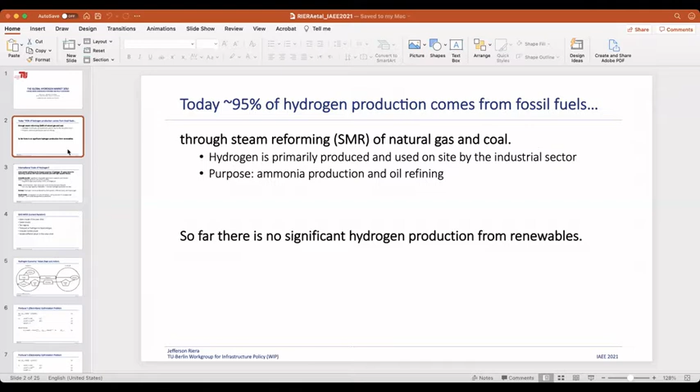However, one thing to consider is that hydrogen is incredibly versatile. We can utilize it for fuel for transportation, for heating, to produce e-fuels, and for energy storage. So as a result of this, the global demand for hydrogen is expected to increase, and renewables can potentially facilitate that production worldwide. So with different countries trying to produce hydrogen, there's a significant potential for trade.

So in terms of international trade, the Asian market will likely be the largest consumer of hydrogen, and that can potentially open doors for exporting countries with low-cost electricity and high capacity factors. Specifically, countries like Australia, at least the south of Australia, has significant renewable generation capacity and limited interconnection with the rest of the country. So it's a prime area to produce hydrogen, and as a result, Australia has made plans to export to Japan, South Korea, China, and Singapore once its facilities are up and running.

The other part of the world, you have Chile, which leverages one of the best solar resources in the world. It has low cost and high capacity renewables potential in the Atacama Desert, and that can translate to low cost hydrogen production for Asia. In Europe, you have Norway, which has the potential to produce hydrogen from hydropower, offshore wind, but also from natural gas through methane steam reformation. And also Norway has the idea of trading this hydrogen with the Asian market itself.

And then lastly, countries such as Saudi Arabia, you have complementary wind and solar resources to generate hydrogen in different parts of the country, and it's potentially to be transported as ammonia. Now, one fun fact is that Saudi Arabia exported the first shipment ever of carbon neutral ammonia to Japan, and this is a very important realization for the hydrogen economy for both countries.

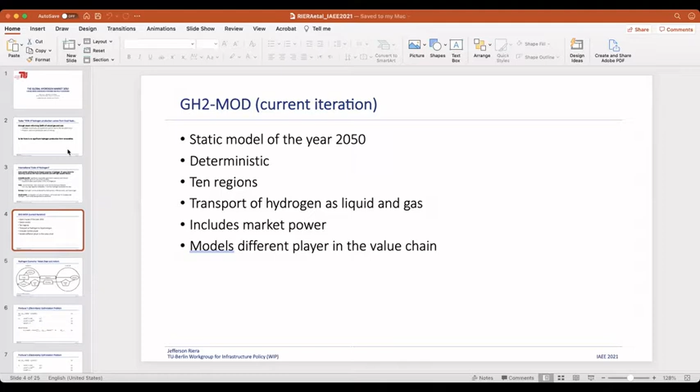So what we did was we developed the first iteration of the GH2 model, so our version of the global hydrogen model. And it's a static model of the year 2050. It's deterministic, so it assumes perfect information, and it aggregates the world into 10 regions. And it allows for the transportation of hydrogen as liquid and gas. It includes market power, and it models different players along the hydrogen value chain. Specifically, those players are

So each of these players essentially is modeled as a profit maximizing problem. And here we have the problem for the producer, in this case, electrolysis. Essentially, the producer is trying to maximize the difference between its revenue and its production costs, and it's subject to a capacity constraint, which dictates the upper bound on the amount of hydrogen that can be produced in that given year. We can also have constraints that restrict total production due to governmental limits, so that's equation 3, and this is production ceiling essentially. And then we also have the non-negativity constraints of the sales.

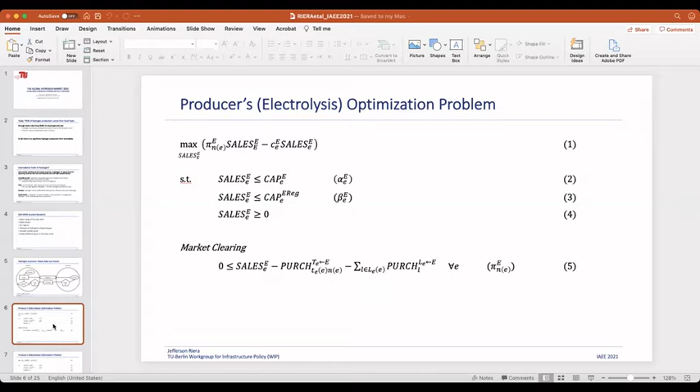We would want them to be positive. And then we also have the market clearing condition, which states that the producer sales must be greater than or equal to the purchases made from its trader and the sum purchases of its liquefiers. And it's this market clearing condition that establishes the market clearing price that the liquefiers and the traders pay to the producer. So we have the same optimization problem under constraints and market clearing conditions for all other players, and we also have them for the player that is the producer, but it's producing via SMR.

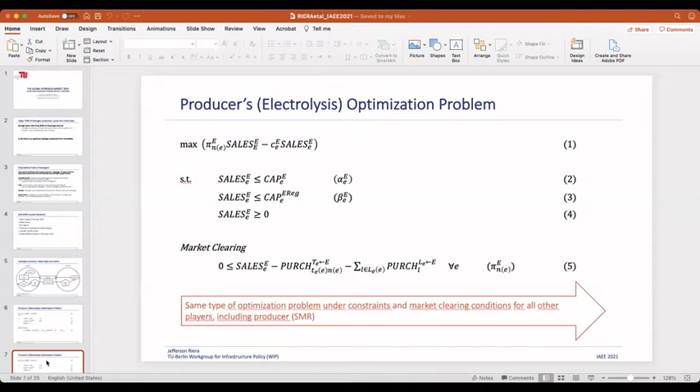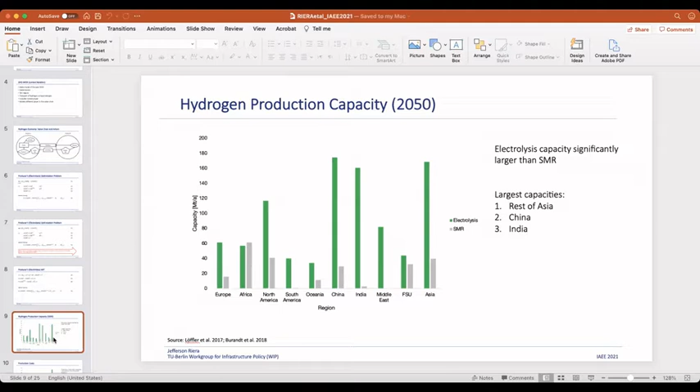So for each player, we collected extensive data on technologies, the cost, the demand, the infrastructure for our specific target year 2050. So here for the producer, we have hydrogen producing capacities, and these were obtained from model outputs of GENeSYS-MOD, which is a global energy systems model developed by colleagues at TU Berlin. So what we see here is that for 2050, we have SMR and electrolysis capacities for each region, and we see that electrolysis capacity is significantly larger than SMR. The largest electrolysis and total producing regions are the rest of Asia, China, and India.

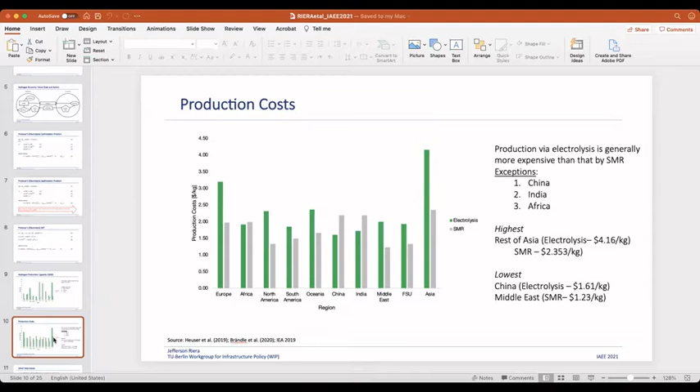And in terms of production costs, we derived estimates using IEA and equations found in Heuser et al. and Brändle et al. And production via electrolysis is generally more expensive than that by SMR. That's the case for all regions except for China, India, and Africa. And what we have is that the highest cost for both electrolysis and SMR is found in rest of Asia, and the lowest costs are China for electrolysis and, not surprisingly, the Middle East for SMR. So other model inputs are liquefaction and regasification capacities and costs, total transportation costs, including the shipping vessels and the pipelines. And we also take into account loss rates along the value chain.

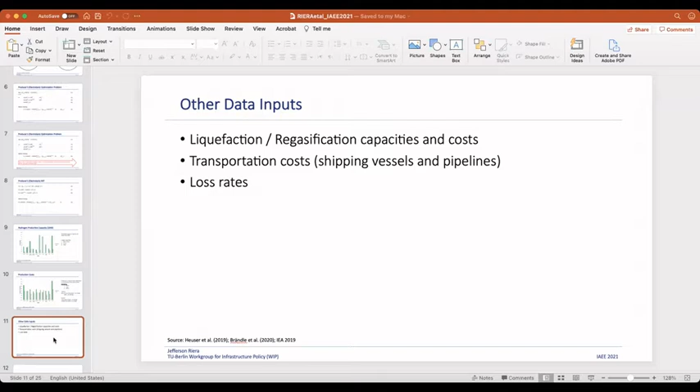So we ran the model considering perfect competition and market power, and these are the results that I'm going to present now. So for perfect competition, we have a global hydrogen demand of 634 million tons for the year of 2050. And in most regions, what we see is that they're meeting their demand with local production. The rest of Asia, however, relies heavily on Chinese hydrogen imports. And you can see that here. And nearly half of its demand is met with imports from China.

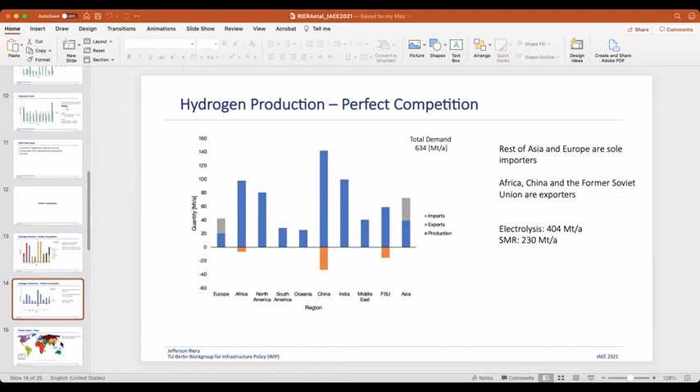And then on the other hand, you have Europe, where it's relying on the former Soviet Union and Africa to meet its hydrogen demand. And again, it's also the case that half of its demand is met with imports from these two countries. So on the production side of things, what we're seeing is that the rest of Asia and Europe are the sole importers, and Africa, China, and former Soviet Union are the exporters. And nearly 2/3 of hydrogen production comes from electrolysis, with the remaining coming from SMR. So here we have the network, essentially with our regions. And again, each region, well, at least most of the regions, are meeting their own hydrogen demand. So we have isolated systems: North America, South America, the Middle East, India, and Oceania.

So the results for market power are a little bit more interesting. What we see for market power is that we have a global hydrogen demand of 520 million tons for 2050, of which China, Africa, and the rest of Asia account for 50% of the global demand. And if we look at how the demand is met, what we're seeing is that there's significantly more trading happening with market power than there is with perfect competition.

What initially happens is that the global demand is reduced by 20%, and India's demand is cut in half. In the perfect competition case, what we were seeing was that the demand for India was close to China's. So here's India in perfect competition, and then in market power. What we're also seeing is that Africa's hydrogen is penetrating different markets.

So in the perfect competition case, you have it selling primarily to Europe, or only to Europe, but now it's also selling to the Middle East and to the former Soviet Union. One thing that we're noticing is that other regions are also starting to sell to other markets as well. However, North America, South America, India, and Oceania still remain isolated.

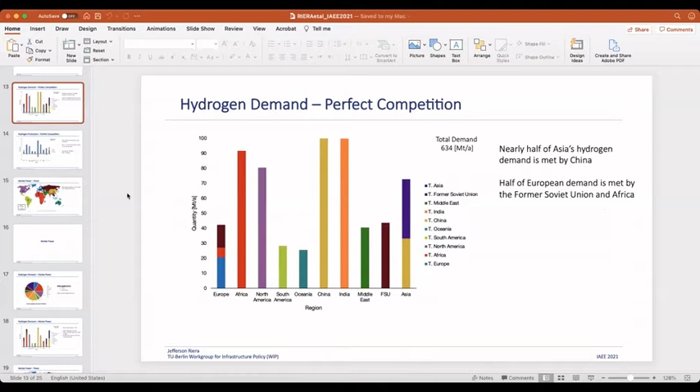Another difference between market power and perfect competition is that with market power, Europe is relying significantly more on imports to meet the hydrogen demand, and specifically imports from Africa. So in the perfect competition case, Europe with its own production met at least half of its demand, but now it's only meeting a very small percentage.

So this is now the network that we developed under market power. And essentially what we're seeing here is that, again, there's significantly more trading between the countries. However, specifically, we're seeing two big trading factions occurring here. So we have the flow from Africa into the Middle East, Europe, and former Soviet Union, and you have this faction here in Asia between China and the rest of Asia.

What we're also noticing, however, is that despite there being more trade between the different regions, there isn't any trade in liquid hydrogen. And this is attributed to the high cost of liquefaction, the high cost of regasification, but also the high cost of shipping.

On the production side, what we're seeing is that right off the bat, China's production accounts for nearly a fourth of the global hydrogen production. And what we're also seeing is that countries are taking advantage of external hydrogen prices so that they are strategically importing and exporting hydrogen from the same regions. So essentially the desire to trade depends primarily on the regional prices and also the production capacities available within the country itself.

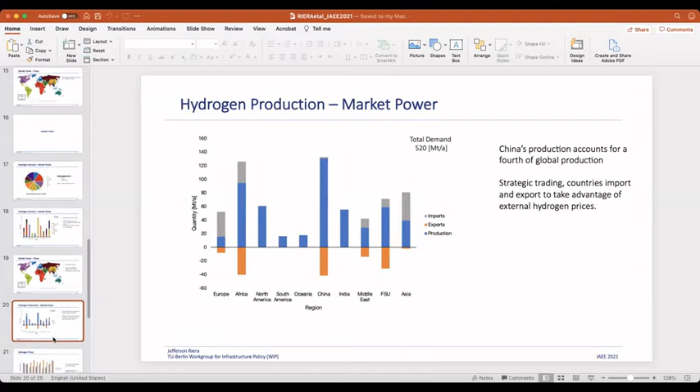And then in terms of prices, comparing the perfect competition case with the market power case, one thing we're seeing, which is not surprising, is that under market power, you generally have higher prices. All regions except for Europe and Asia have a much higher market power price than the perfect competition price. And when you take the weighted average of the global price of hydrogen, for market power it's $3.36 per kilogram, compared to the perfect competition case, which is $2.72 per kilogram. So essentially, there's a 25% markup when you have market power compared to perfect competition.

So essentially, these are our preliminary results for our model. But what we are trying to do now is expand the model to have a multi-period framework. Specifically, we want to incorporate more years starting from 2020, and we also want to include seasonality throughout the year. And then a big topic of discussion currently is the storage of hydrogen and also the transportation of hydrogen. So what we want to include is also storage operators. We also want to include the transportation of hydrogen as ammonia.

So ammonia transportation is very important given the fact that it's potentially much cheaper than shipping liquid hydrogen because of the added energy density that ammonia has compared to liquid hydrogen. So by modeling the transportation of ammonia, we also have to add two additional players: a hydrogenator, which converts the hydrogen into ammonia, and a dehydrogenator, which converts the ammonia back into hydrogen.

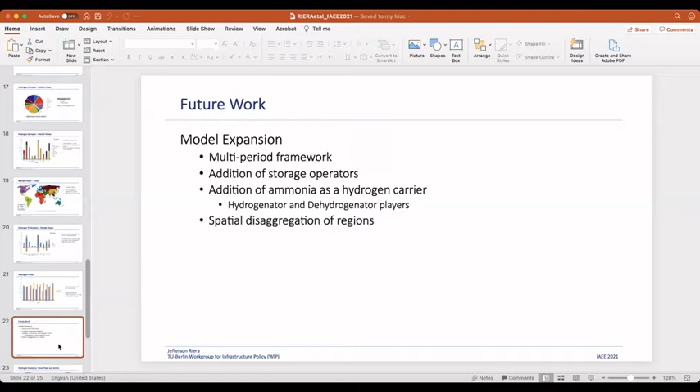So once we do that, our hydrogen economy would look pretty much like this. Now you not only have the traders and the producers and the liquefiers, you have the hydrogenators as well. The producer would also sell to the hydrogenator. The hydrogenator sells it to a dehydrogenator in another country, and it ships it via shipping vessels. But you also have the trader selling to the storage operator, and then the storage operator can strategically sell it to the market at a different time period.

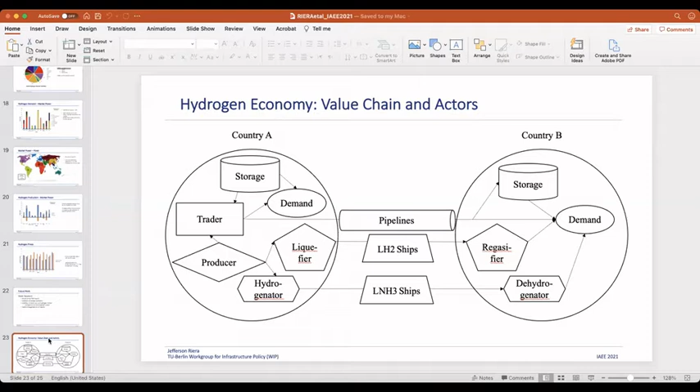So this is essentially where we want to go moving forward with our model, and essentially that's everything I have to present for you guys. If you guys have any questions. Excellent, perfectly on time.

Are there any questions? In the meantime, I'm going to start. I was curious about the question of market power. Why did you think that is an issue, one of the first issues that you wanted to explore? Which is the basically the idea that you have behind, or the driver that you're going to point out in terms of who and why there is this vulnerability to market power?

So currently, there isn't that much hydrogen production in the world, so the market isn't really developed. So what we want to make sure is to include different cases. I just realized that my camera wasn't on. Apologies. So we want to include different cases because we don't know exactly how the market is going to develop. That being said, with market power, at least what we're seeing in different markets, for example, the natural gas market, we see that you potentially have price differentials that occur, or price increases as a result of market power. So some big producing countries are able to strategically manipulate or alter the prices, and that's important in terms of hydrogen, given the fact that hydrogen is already very expensive. It's going to be a potentially expensive energy source. So we want to also capture that as well.

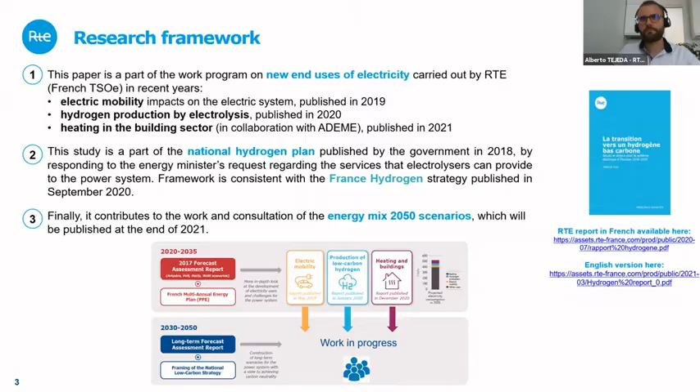I will continue with the state of the art on some perspectives of this study. First, let me give a glimpse of how hydrogen is consumed today, because nowadays we talk a lot of hydrogen. We think of hydrogen for fuel cells in mobility or for storage, but let's see how hydrogen is consumed today. In France, at least, 60% is consumed for oil refining, for petrol and diesel. 25% is used for ammonia and fertilizers, 10% for chemicals, 1% for metallurgy, and the rest is used for other things.

Now that we know how hydrogen consumption is done, let's see how it's produced. Most of it, 95% of hydrogen, is produced from fossil fuels, most of it from steam reforming, which is high carbon intensity. So it produces a lot of CO2 when we produce hydrogen from steam reforming. So what we look at nowadays in order to reduce emissions is how we can substitute this production with low carbon hydrogen. I have to say that in France, hydrogen production results in total emissions close to 10 million tons a year, which represents 2 to 3% of the country's total emissions. So the first challenge of hydrogen is to reduce these carbon emissions for these industrial applications.

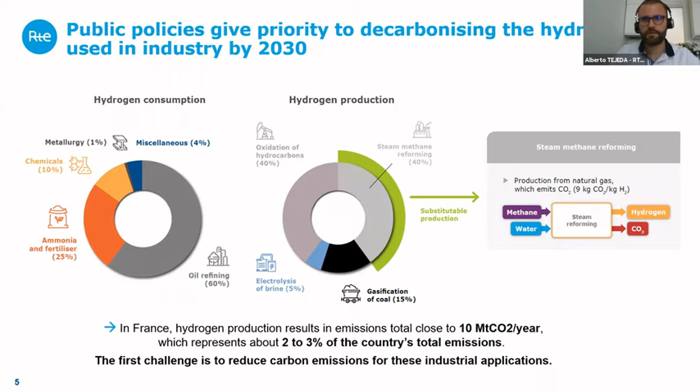There is another use of hydrogen, as I said before. We think of it as a storage for the electric system. It's the concept of power to gas to power. We can imagine that we use electricity to produce hydrogen thanks to electrolysis, and then with this hydrogen we can do two things for producing electricity back. Either we use it in fuel cells, which are going to produce electricity, and we inject it back to the system. Or we use the hydrogen in the gas sector: we can put hydrogen directly in the pipes with some limits, or we can convert hydrogen to methane and use it as synthetic methane. And this gas can be used by power plants and combined cycle gas turbines, for instance, to produce electricity back to the system.

From a technical point of view, the power to gas to power electricity storage solution is penalized by its efficiency. You can see here the efficiency is from 25 to 35%. So this is not a very good point for storage, but there is good reason to explore its long-term potential, particularly for providing seasonal storage in electricity mixes with a high percentage of variable renewable sources, because hydrogen and methane can be stored for a long time, so this can be interesting for seasonal storage.

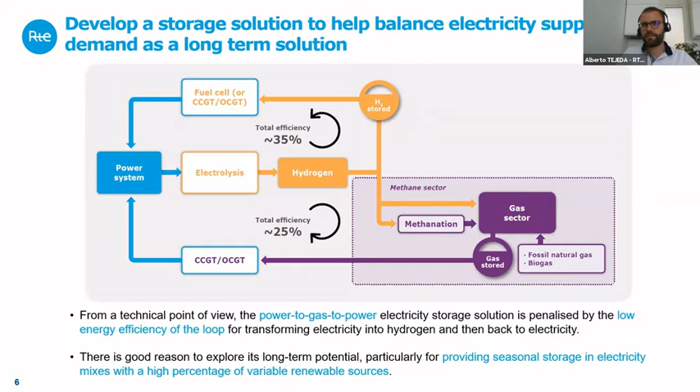So we have presented how we can decarbonize the end uses of hydrogen, and how we can use hydrogen for energy storage. These two reasons are often confused, but they are quite different, as we have just said. First, we have the first use of hydrogen today. The first challenge is to decarbonize gas uses or mobility. This will help us to meet international decarbonization targets in sectors which have emissions hard to abate, like heavy mobility or, as I said before, steel production. This is what we call power to X.

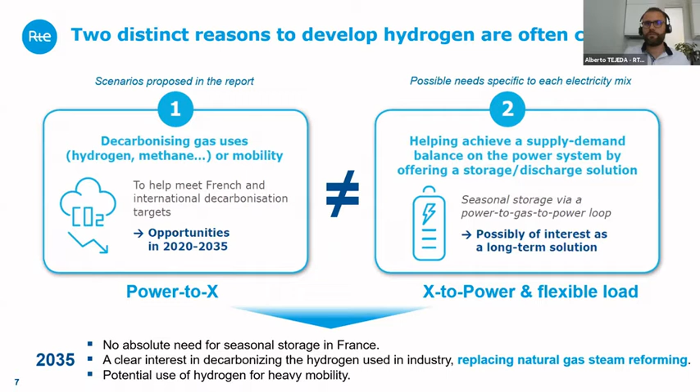And then we have the use of X to power, which can help us to achieve supply-demand balance of the power system, offering a storage discharge solution. This can be of interest, but we see it as a long-term solution, not for the next decade, but later on. So the focus horizon of the study is 2035. We have analyzed that there is no absolute need for seasonal storage in France for that horizon. There is a clear interest in decarbonizing the hydrogen used in industry, replacing natural gas steam reforming, and there is also a potential use of hydrogen for heavy mobility.

So now we have said that we are going to produce this hydrogen. Of course, it has to be low carbon, otherwise there is no reason to produce hydrogen from methane if it is going to emit more emissions. So there are two main, mature technical solutions to produce low carbon hydrogen. On the left-hand side, we have steam methane reforming or gasification of coal coupled with carbon capture, where we can capture the CO2 so it is not emitted to the atmosphere. This is the solution that is foreseen in Germany. It will play a role for economic reasons. In France, the national strategy for climate requires a limited use of carbon capture solutions because of technical and economic feasibility and also acceptability. On the right-hand side, we have the other technology, which is the production of hydrogen from electrolysis from the power system, either from renewables or of low carbon electricity such as nuclear.

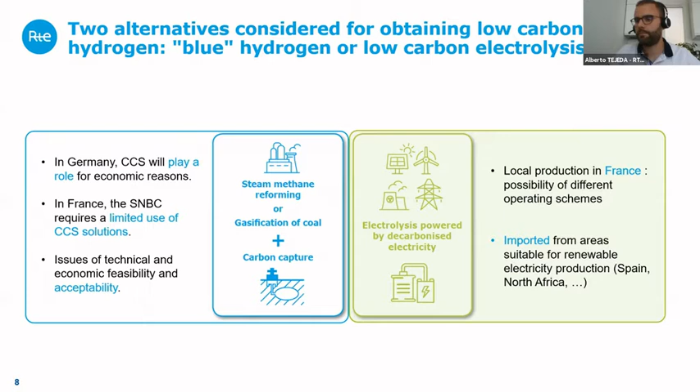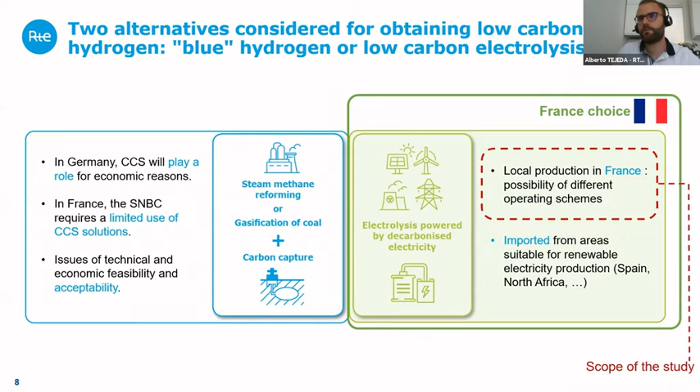This can be done either in local production in the countries, in France, for instance, with different operation schemes, or hydrogen can be imported from other areas, as we just saw in the previous presentation, which was quite interesting. So the right-hand side of the slide is the electrolysis production, which is the France choice, and our scope of the study is the local production from electrolysis. So let's pass to the methods of the study and some main results.

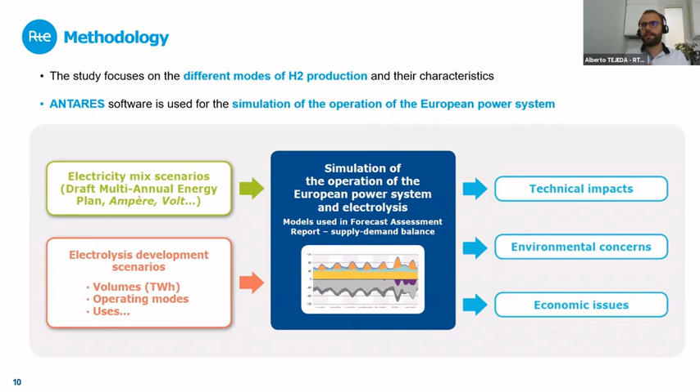So what we have done to analyze the production of electrolysis from the electric system. We have focused on different modes of hydrogen production from electrolysis, different operation modes. We have used the Antares software, which is used to simulate the operation of the European power system at an hourly level. So in input, we have different electricity mix scenarios with nuclear and renewables. We have as well electrolysis development scenarios with different operation modes of electrolysis. We put it in the software, which is going to simulate the power system hour by hour in order to meet the demand and to select the different power generation system which is going to be producing at each hour. And at the end, we can analyze the different operation modes of the electrolyzers from 3 points of view: the technical impacts, the environmental concerns, and the economic issues.

So let's present now the 3 operation modes that we have analyzed in this report. First, we have analyzed what is going to happen if we operate electrolyzers only during periods of marginal renewable energy sources generation, or when nuclear has enough power to produce electricity and there is no other carbon production in the system. So this translates to operating the electrolyzers when prices are low. This is the first operation mode.

What are the main advantages? It is carbon-free and inexpensive electricity, as it is produced by renewables and nuclear. The main disadvantage is the low operation time and the highly variable and unpredictable generation. So as we can see in this graph, this is the generation of hydrogen. So it is not used all the time. So this translates to low operation time of electrolyzers, which will be an issue for economic reasons, as we will see later on. The second operation mode is in base load.

So electrolyzers are going to operate all the time except peak periods. So when the electricity price is high, we can switch off electrolyzers. The main advantage is the long operation times of electrolyzers, as they operate almost 95% of the time. And the main disadvantage is the potential impact on CO2 emissions and high electricity supply costs. And I will come back to this later on.

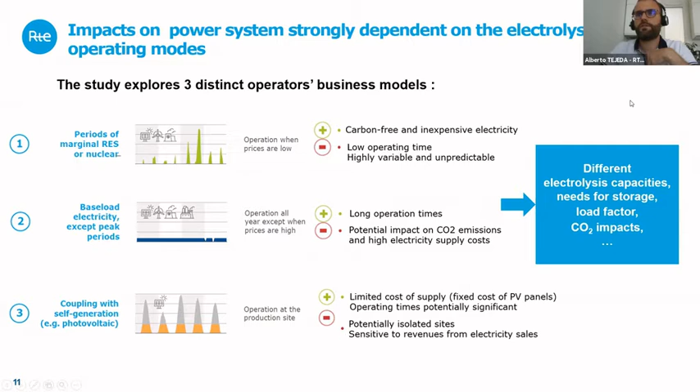And the main disadvantages are the potentially isolated sites, as we're going to put the electrolyzers next to the photovoltaic production, which can be places where the hydrogen demand is not there. So there are questions of storage and transportation. And also it is sensitive to revenues from electricity sales, as the business model of this operation mode depends on how much we can sell our electricity. So this translates into different electrolysis capacities, needs for storage, load factor, and CO2 impacts. I will present some of the results.

First, the technical impacts of the different operation modes. The power system planned under the multi-annual energy plan, we have analyzed, can accommodate the development of electrolysis without any real difficulty. So this is in the horizon of 2035. At this horizon, the carbon-free electricity generation potential planned by the French government is around 600 terawatt hours, and this is enough to meet the electricity consumption of all uses of electricity, plus the mobility consumption of electric vehicles and the electrolysis consumption, which will be roughly 30 terawatt hours at this horizon.

Now, this is in terms of energy, but as a TSO, we are very concerned about adequacy, so meeting electricity demand at each second. Our technical analysis of how electrolyzers function has revealed that they have the capability to provide flexibility services to the system for supply-demand balance and for grid operation.

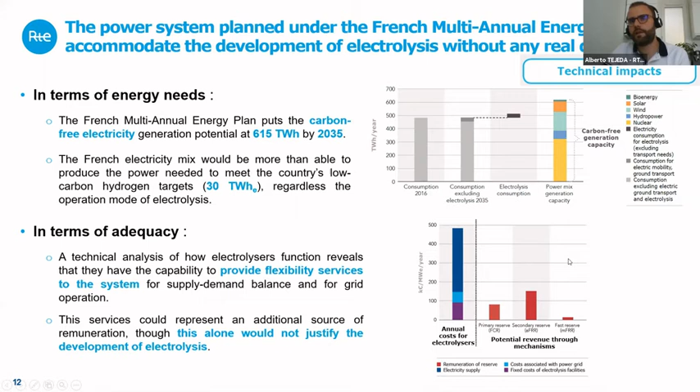So we can see on the right-hand side of the slide, in the lower part, on the left-hand side of the graph, the annual cost for electrolysis, which is mainly the electricity supply, the cost associated with the power grid, and the capex of electrolysis facilities. And on the right-hand side, we have the remuneration of different services to the operation system. So this remuneration is lower than the cost. So this is not going to be the main business model of the electrolyzers. It's of course the sale of hydrogen.

From an environmental point of view, replacing fossil hydrogen by electrolysis leads to a reduction in CO2 emissions. In France, this holds true in all scenarios, because the electricity generation in France is to a large extent already carbon-free, and in the foreseeable future, with more renewables and still a lot of nuclear, it will be the same. And there will be significant reductions in CO2 emissions in France, from 5 to 6 million tons per year. And they come essentially from the substitution of steam reforming with carbon-free electricity.

In Europe, it's a little different. It is true if the power mix is adapted with more carbon-free generation, because if we produce hydrogen from electricity which has been produced from fossil fuel generation, due to efficiencies and losses, at the end we don't have any interest. So all other things being equal, we can see that in France, exporting carbon-free electricity appears to be a more efficient way to reduce European emissions than replacing steam reforming with electrolysis of water. It's better to export low carbon electricity in order to reduce emissions in Germany, in Poland, or wherever in Europe. But if the carbon-free power mix is developed as well in Europe, the carbon balance is positive at the European scale.

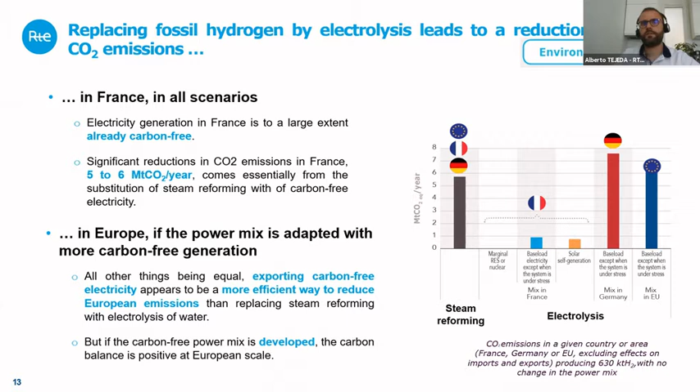Now I will finish with the economic issues. As we saw in the first presentation, hydrogen costs from electrolysis are higher than from steam reforming. So the cost of transitioning to electrolysis is high, but is justified by the reduction of CO2 emissions. In our analysis, the cost of hydrogen production by electrolysis goes from €3 per kilogram in the base load scenario up to €7 per kilogram, depending on whether we use renewables. So it appears to be higher by 2035 than hydrogen produced by steam reforming, except if CO2 is based on the shadow price of carbon.

If we take CO2 carbon prices, this can be seen on the left-hand side of the graph. So we have the steam reforming hydrogen production with a CO2 price of €30 per ton. The production of hydrogen from steam reforming is under €2 per kilogram. But if we take into account an increase of the CO2 cost per ton, the cost of hydrogen production can be up to €5 per kilogram.

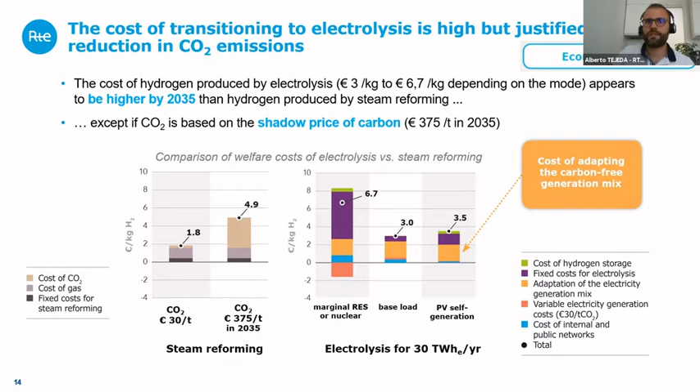Thank you very much, Alberto, also for giving us the background for hydrogen and for making clear this difference between decarbonizing final uses and providing flexibility also to the electricity sector.

If I can summarize, your scenario is to 2035, and you say that it is somehow quite easy to get to that point. So despite all the questions that we actually have regarding the development of this technology, who is going to invest? So you seem to be quite optimistic. Is that because the total amount that is needed in France is low, or because of the development of hydrogen itself, perhaps not only in France, but everywhere?

Well, thanks for your question. It's a very good question. Well, I wouldn't say we see it as optimistic. I would say that we analyze what the government is aiming to achieve in 2030. France published its hydrogen strategy plan 1 year ago, and they are going to invest a lot of money in low carbon hydrogen. There is a projected cost of electrolysis that is expected to be reduced in the following years.

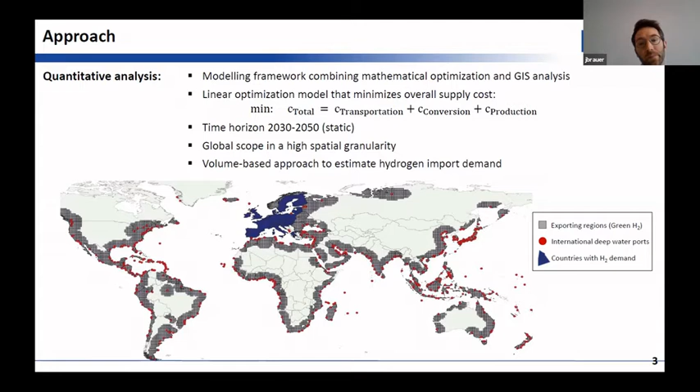The production of low carbon hydrogen is associated with costs that depend on the availability of the resources. And then hydrogen is transported via pipeline to the exporting point. And from the exporting point, it is then further transported to the border of the European Union, either via seaborne transport or via pipeline transport, if this is available. And once the hydrogen is landed inside the EU, it is distributed to the individual countries to supply their demands.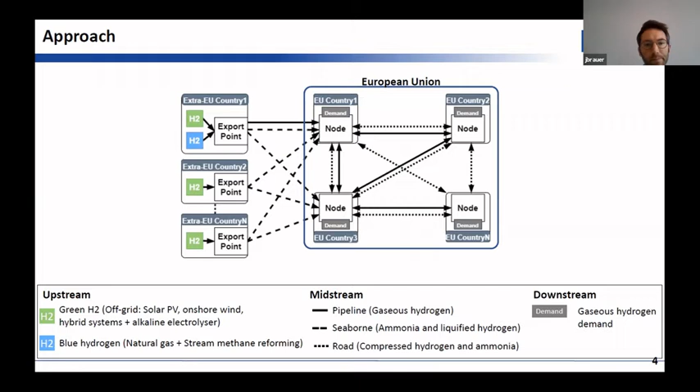Okay, so how do we use this model to answer the question? What is the methodology behind it? We use a two-step approach. In the first step, we set up a base case scenario. And in the second step, we then conduct a sensitivity analysis on a variety of input parameters and confront it with the base case. So what are the key parameters of the base case? For the hydrogen downstream, we assume that 50% of the demand stated in the Hydrogen for Europe study would need to be supplied via imports.

The cost of midstream technologies, which includes the conversion process, are set on the average cost projections that are found in the literature. And with respect to pipeline transport to the EU and within the EU, we consider the retrofitting timeline of existing natural gas pipelines according to the European Hydrogen Backbone Study. This is a study that projects potential evolution of a dedicated hydrogen pipeline network within the EU. So most European gas TSOs have been involved in the study.

On the upstream side, the parameters linked to the production of green hydrogen correspond to the average values found in the literature. Additionally, we set a cap on the availability of renewable energies for the production of green hydrogen exports in the potential export countries to mimic a limit of the development of the local renewable industry. And this limit is set to the average global PV and onshore capacity addition between 2015 and 2019. And those values have been corrected by the GDP per capita to account for the strengths of the local economy. And they also have been corrected by the exploitation of exportation trajectory to reach carbon emission targets in 2050, and so to also account for the domestic decarbonization in the exporting countries. And this economic potential that we use here might differ significantly from the technical one.

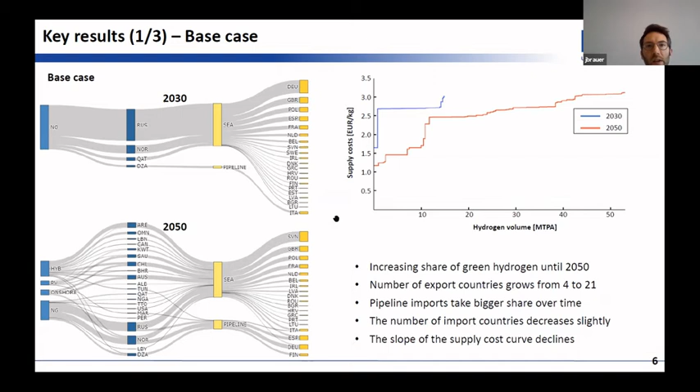This basically corresponds to a shift on the supply curve. What we also see is that costs associated to the transportation have only a minor impact on the overall supply costs. However, the availability of retrofitted infrastructure is important. The sooner the pipeline is available, the more competitive the hydrogen is. And then changes in the natural gas prices have only minor impact on the overall supply cost. However, they cause an offset. This could either be positive or negative.

And then what we also see is that a slower decrease in costs of green hydrogen technologies compared to the base case decreases competitiveness of hydrogen imports, whereas faster cost reduction causes lower supply costs. The availability of natural gas for the production of blue hydrogen has a significant impact on the supply costs. An increasing availability increases the competitiveness of imports, while a decreasing availability has a significant decreasing effect. And the availability of renewables, what we see here is that when countries are able to install more renewables than the average observed in the past years, the competitiveness of the imported hydrogen increases due to a growing utilization of the pipeline infrastructure. So those two things are really important here.

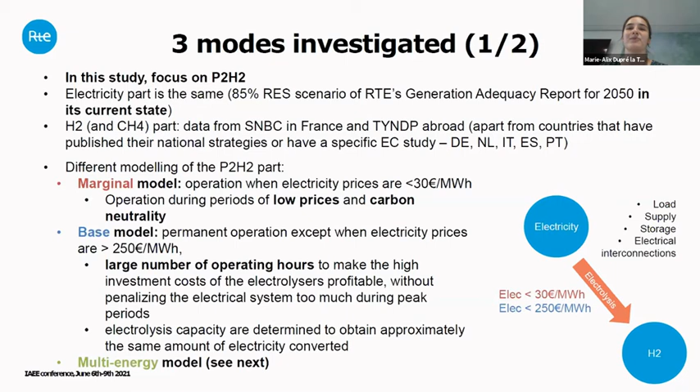The multi-energy model is quite different because it's more a difference in modeling. So here we can see that, differing from the previous modes, we've got a real representation of the hydrogen and the methane systems. The hydrogen has a load to satisfy. It has got different supplies apart from electrolysis and steam reforming, extra supply providers. It's got storage as well, but here we did not represent the interconnections of hydrogen, and we are supposing an infinite grid. It's actually the same for gas. We've got a load, a supply, a storage, and no interconnection, like an infinite grid.

And so, as I said, we can do steam reforming from gas in order to produce hydrogen. We can have electrolysis and methanation, well, actually the transformation from electricity to methane, which is electrolysis plus methanation. And we've got also a retro influence because electricity can be made from gas, and the gas system knows it. It's not just on the electricity part. It consumes gas whenever the CCGT and OCGT work for the electricity system.

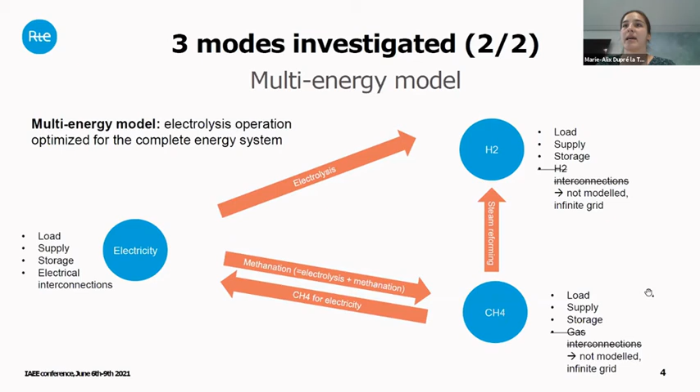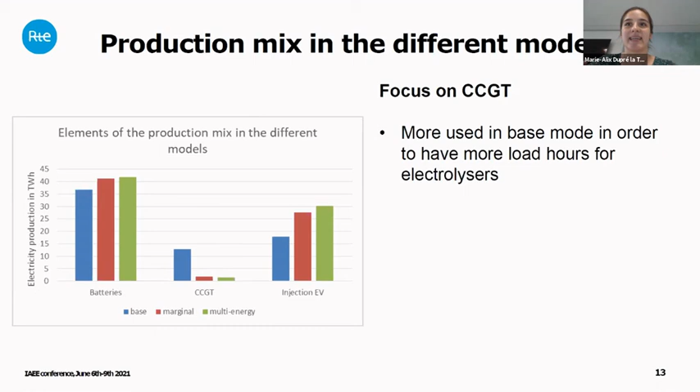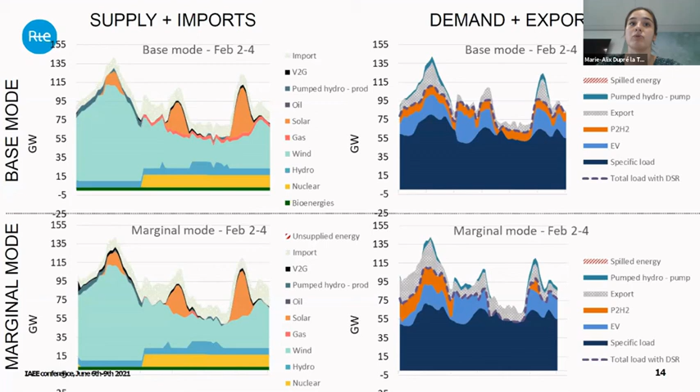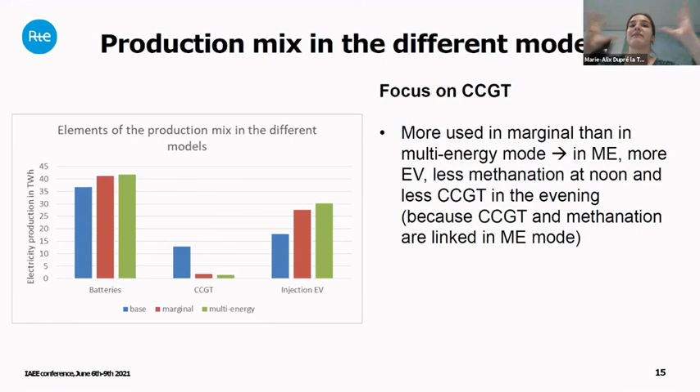And what is not very well visible here is the fact that for the marginal mode, we've got 13% more CCGT production than for the multi-energy mode. This is because the multi-energy mode sees the system as a whole, and it's not interesting for the system to lose energy to produce methanation at noon and then burn the gas in the evening. You don't have an interesting efficiency.

I'm sure it's going to be more visible here. Here we're burning gas, right here, and it was just gas that we had produced right before, on the right part. The multi-energy system sees that this is not interesting. It's more interesting to use more vehicle to grid, and so it doesn't use the gas at all during this period. Instead, it uses more batteries and vehicle to grid.

So, as I said, multi-energy modeling represents the system better, and it has important impacts on prices and production volumes, as we have seen. What is quite interesting, and that we could not have seen before, is that from an electricity price perspective, hydrogen and methane demand prices are becoming important in price formation. So this was quite new.

In this multi-energy modeling, we can also see the levels of the different stocks of all the energy types, and therefore we can choose which stock we want to use at which moment. For future work, we are at the moment improving hydrogen and methane modeling. For example, the hydrogen grid could be very important and determinant for the results. So we're working on that, and also on multi-stock management. We're also working with the CEA, a French institute, in order to add district heating to the model. All right, thank you very much.

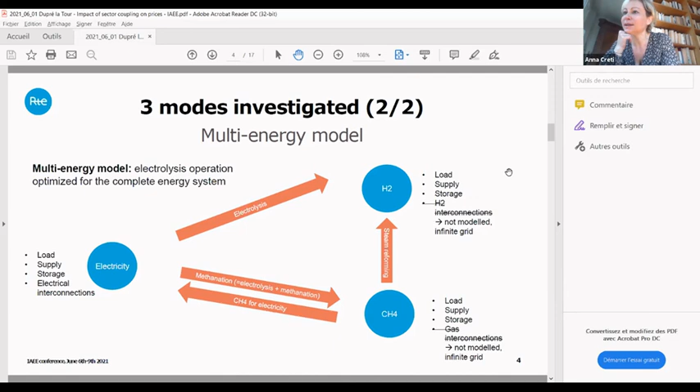I don't think I was clear enough. Thank you very much. I think the full presentation raised most of the questions that we have discussed, but there will be room during the conference to go back to this topic. You will find hydrogen in the gas sessions as well as the dual plenary. So I look forward to our future discussion. Thank you everybody for joining this session, and thanks to the presenters.